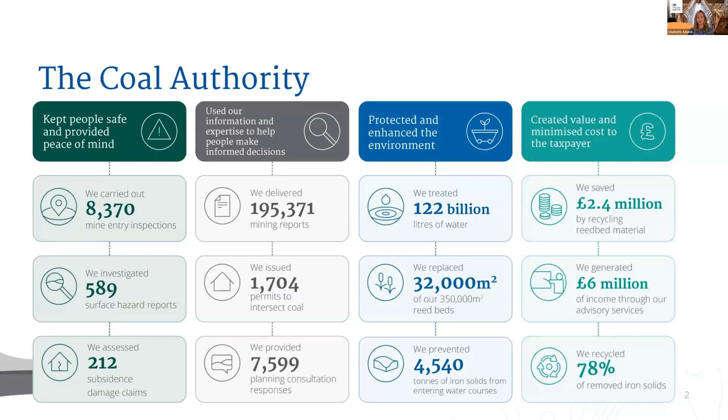So this presentation will focus on the Gateshead project, where we've been supporting Gateshead local authority, and we've just recently completed this work as the scheme is now operational. It started when Gateshead had an existing 5-kilometre heat network with 4 megawatts of gas engines and private wire electricity. They came to us saying, could they double the output and the size of the heat network without necessarily doubling the carbon emissions from it? And could the mines beneath the town be the heat source for this extension to the heat network? So that's where we became involved in the project.

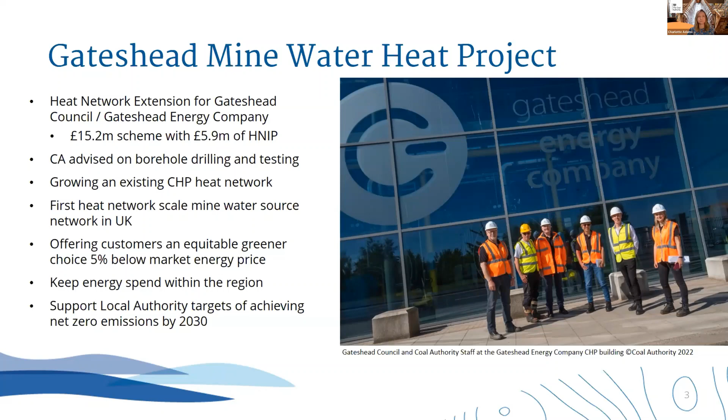So the Coal Authority were commissioned to do the feasibility work for them, and Gateshead gave us 5 areas where they potentially had land that could host the energy centre and the boreholes. We looked at those 5 areas, and we also looked at the mine plans and which collieries had worked in the area in order to identify the best seams to use for the scheme. We ended up selecting the High Main seam, at about 50 metres beneath the site, and the Hutton seam, about 150 metres beneath the site. High Main for re-injection, Hutton for abstraction. We chose these because they were the most pervasive across the sites.

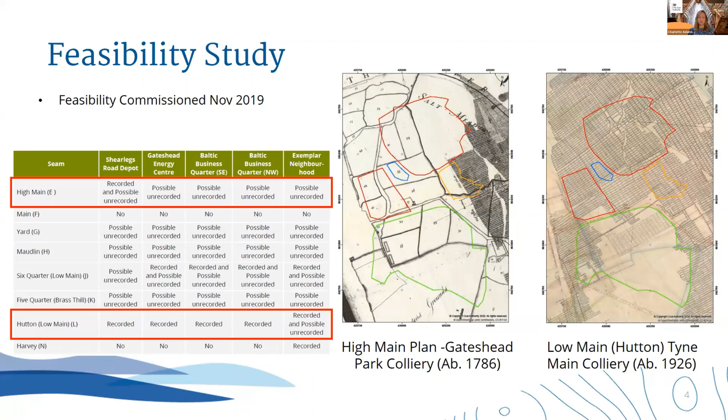But from the start of the feasibility work, looking at the plans, we met the first criterion for a successful scheme, which was that we had more than one seam beneath the area, i.e. somewhere to take the water from and somewhere to take the water to. Moving on to the hydrogeological considerations, the next criteria we look for are: are the seams flooded, and is the depth to the mine water within 100 metres of surface, which for UK electricity pricing looks to be roughly the economic limit. So 100 metres or less is what you're looking for, unless you've got access to a lot of low carbon electricity on site. We answered yes to both: we had flooded seams, and mine water levels were within about 20 metres of surface.

We weren't exactly sure which mine water block the scheme sits in. The UK coalfields have been rationalised into a series of blocks based on their hydraulic performance and connections between them. But we confirmed by drilling that the site was in the Walker block, and that the High Main seam was in continuity with the High Main Post Sandstone, and the Hutton seam was confined. So we had slightly different aquifer performance in each. Both showed tidal responses: a direct one in the High Main because of the direct linkage. In the Hutton, it was an elastic response, as the river, which is still tidal at this point, had tidal loadings causing compression of strata, and we saw changes in water level at high and low tide respectively.

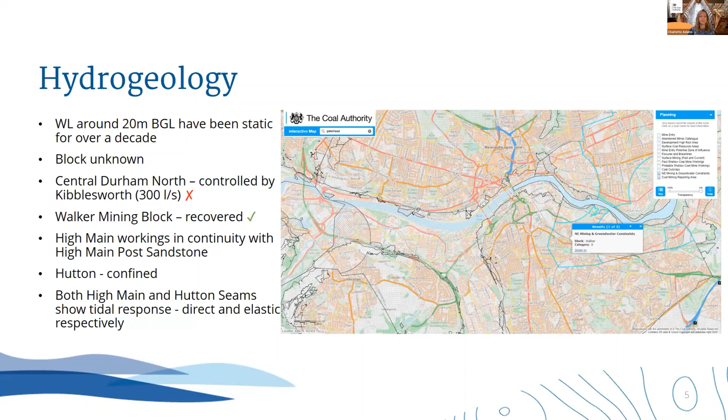And we ended up installing 2 abstraction boreholes because Gateshead wanted to have some flexibility on the scheme so that they didn't always have to run from one borehole. So they could, if they wanted peak loads, run 2, and at lower times they could run one or the other, which gives them a bit more flexibility and resilience on the system.

So we installed 2 abstractions, working with Drilcorp, who did the drilling on this. We supervised, and these boreholes were fully cased down to the Hutton seam and capable of housing 8-inch pumps. We also put in 1 re-injection borehole, which was 20-inch casing down to about 39 metres, so the High Main was a little bit shallower in this area.

And then we undertook test pumping. Once we got the abstraction and the re-injection, we used one of the abstractions to test the kind of doublet that we'd created. And the blue line from the first set of test pumping shows that the drawdown didn't stabilise when we did step testing. And also the drawdown became unacceptable in terms of maintaining enough water above the pump. And we also saw a very flat response across the Hutton seam.

The analogy of this being that you're pulling on a plugged syringe effectively, the experiment you do in school on compressibility of fluids, where they give you a syringe with water in and the end's been sealed off, you're trying to pull the plunger on the syringe out and it won't. And that's kind of what we were seeing here. So we knew the Hutton contained water, we knew it contained voids, but it wouldn't hand it over quite as easily as we wanted to, so we couldn't quite get the yields as wanted.

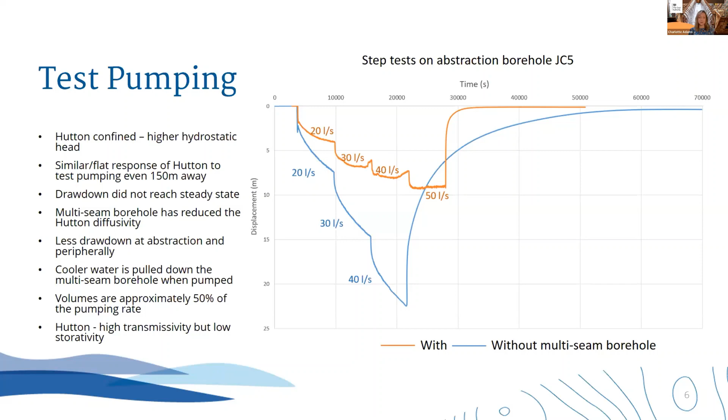So what we ended up doing to preserve the 2 abstractions to keep the flexibility and resilience of the scheme, we drilled another borehole, a multi-seam borehole, which connects those 2 together and effectively acts to depressurize that system. So this gives you a diagram of the conceptual model of what we ended up with. So we've got the 2 abstractions, the re-injection, you can see the multi-seam borehole there. And when the scheme's operating, the water's pumped from the mine, goes through the heat exchanger and returned underground.

The temperatures we're finding in the Hutton seam were between 15 and 16 degrees, at around about 150 metres, and in the High Main at about 40 metres were 11 degrees C. When the scheme runs, about 50% of the flow rate goes down the multi-seam borehole, and when the scheme stops, the flow reverses in the multi-seam borehole. And that's something we'll gather more information on when the scheme operates.

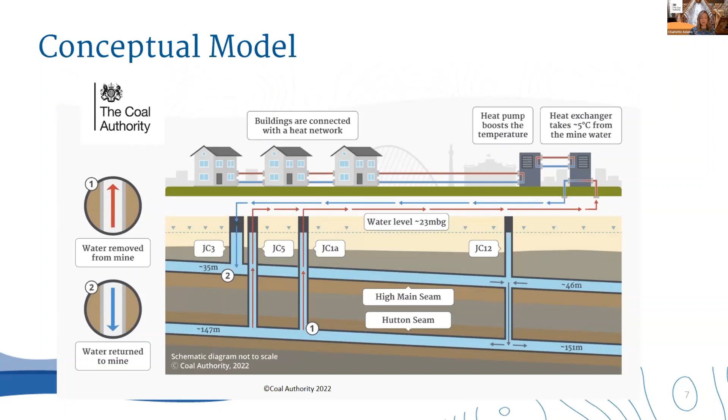And we did more testing at constant rates on both the abstractions together. And during those short duration tests, we haven't seen any decline in temperature. But again, that's something we'll be watching going forwards. So the heat pumps, an ammonia-based heat pump working at a COP of 3, operating around 2,500 hours per year. So it's important to note that it's not running all the time. You're not doing peak loads all the time. It's maybe only running at peak for a few hours a day, and it isn't running every day of the year.

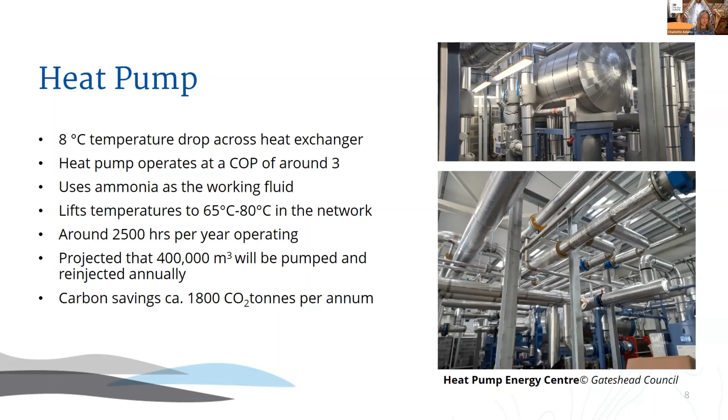It's been permitted by the EA and licensed by the Coal Authority Heat Access Team, and I know there'll be presentations on lots of those aspects coming up over the next days. And it's now in operation, and we're really excited to see how it's performing long term. So the challenges we've had were with the georeferencing of the old plans, meaning that more boreholes had to be drilled than required. And obviously we identified the need for the interconnecting borehole as well. So that was another borehole that was required too.

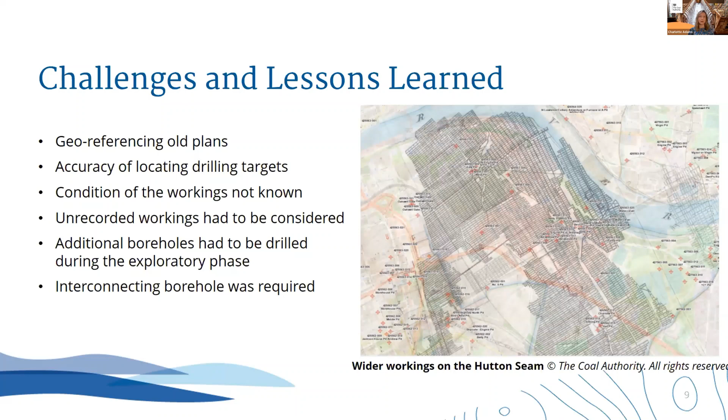But compared to some low carbon heat techs, we're using existing technology, and it was a relatively quick project to do. It's a really good example of how a local authority has led the way and incrementally increased their risk appetite by building on the success of previous energy projects they've had. And for me, the coal's been mined, traded and burned, but the water that's replaced it, we can use that over and over again. And I really like Florian's comment about eternity benefits and eternity burdens, much more eloquently than I've said it here, but I love that aspect of it.

I've had a personal interest in this over the past 10, 20 years, and I'm delighted to have had the opportunity to be involved in this scheme, and we're very excited to see it as it goes forward.